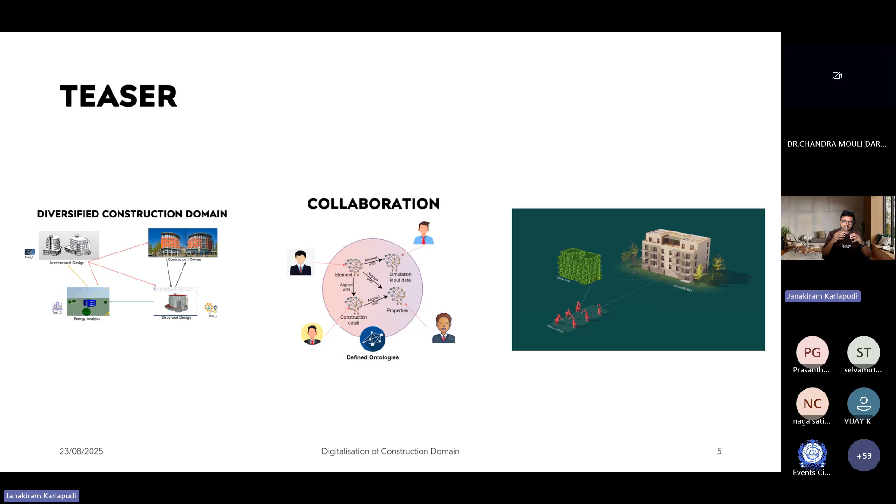Before I jump into the actual presentation, here is a small teaser. I try to take you through a brief discussion about the diversified construction domain and how it can be improved through collaboration and efficient sharing of information among engineers. And how do we take this into a practical application? How can we make everything feasible?

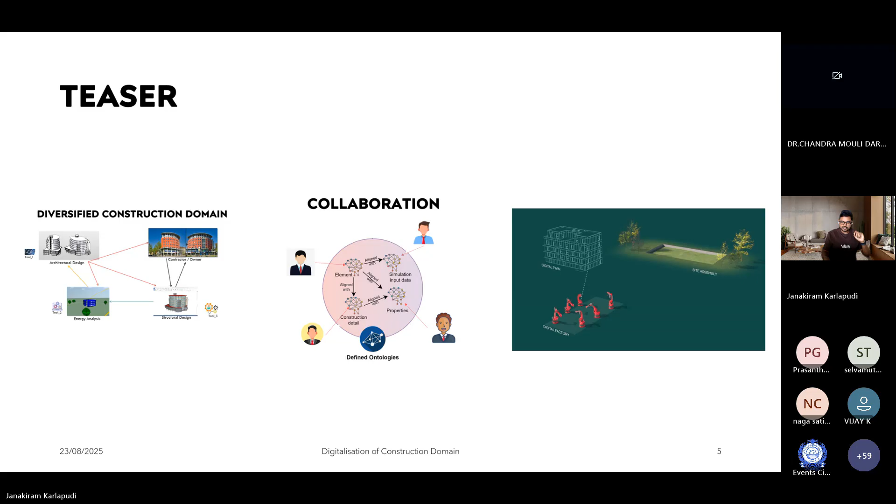Before I start with the background, I just prepared a small interactive session. I know it's been very active today, so let's take a step back, chill, and do an icebreaker.

I hope you can see this - it's Mentimeter. Maybe you can join either by scanning this QR code or going to menti.com and entering this code, so we can do a small interactive activity.

Trying not to have frequently asked questions - could you let me know if there's any trouble joining? Just give me a thumbs up if you can join. Fastest fingers first, I have only limited seats - I guess only the first 50 people can access it, so I'd recommend being fast.

Just wait a minute. If you've already joined, you can also join during the process. I just want to ask one small icebreaker question.

I know you've been in a session until now, so maybe just sit back, relax, and answer this question: one food you could eat for the rest of your life. It's just a one-word question, you can just type your answer.

Let me take this out. Let's jump into the background, the problem statement. As I mentioned, we are going to talk about the diversified construction domain.

Perhaps you might have experienced this in your working life - the construction domain is quite complex, involving a lot of engineers, many design perspectives, the creation of design models, and sharing of data among engineers.

This complex nature of the diverse construction domain always requires recreating existing data. This recreation is always time-consuming and may cause errors, and due to the lack of collaboration and how data is shared, this also results in poor planning.

What do I mean about poor planning or difficulty in collaboration? Let me take a sample example scenario and walk you through it.

Let's take a simple example: Bob wants to construct a residential building, so he hires an architect or construction firm and explains his needs. He wants to construct a 6-floor building where the ground floor would be for commercial purposes, for example shops and so on.

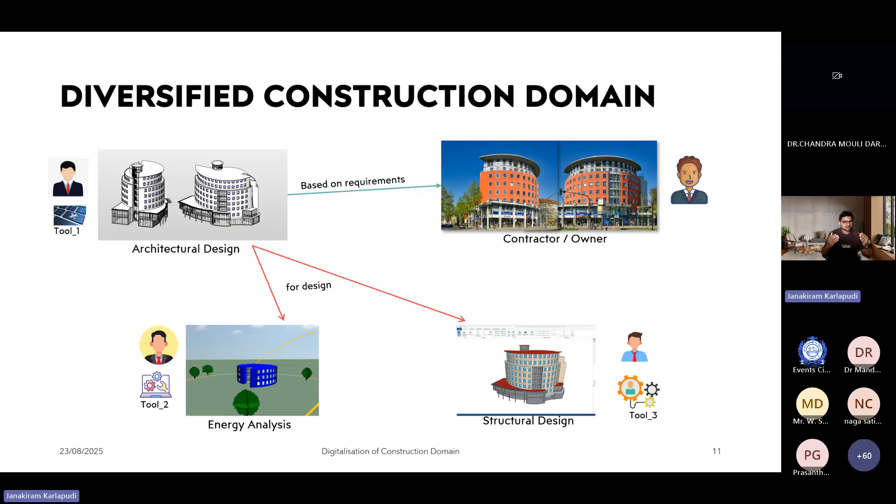Yes, it is already a red flag we see here. It is already a recreation of the data that the architectural model design has, and the other engineers need to regenerate the same information in different tools. As I mentioned, this is highly time consuming and also prone to human errors.

This is not the end of the design, so there are always design changes. For example, maybe the orientation of a building is not set properly so that natural light does not come inside, and they need artificial lighting solutions. To address that, the energy analyst sends back feedback saying you need to rotate the building by these degrees so that you get natural light and don't need artificial lighting.

The same process could happen from the structural designer's side, right? He can say, hey, the distance between two columns is quite large and it's producing large beams, so I need to place another column, and you have to divide your spaces according to that.

So this information is always shared between multiple engineers, and the other one doesn't know what is happening. His design progresses with the assumption that nothing has changed from the initial case. And this communication doesn't end at one engineer—perhaps the energy engineers and structural designers also need to communicate among themselves so they can design their piping or ducting systems accordingly.

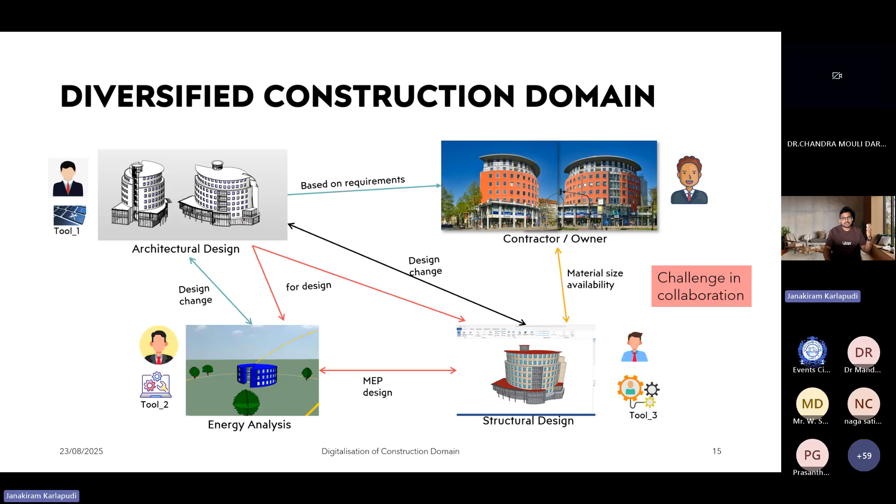Here is the second red flag, where the collaboration among these participants in the domain is very complex. This causes information loss and repetition, and ultimately a lot of time consumption, which leads to poor planning and poor budget allocation.

That's where building information modeling comes in. You might have heard about that. This is a business process that tries to manage the data among engineers and bring efficient collaboration among them. Let's take a simple example and try to understand it better.

There is a research group called buildingSMART International. They came up with a neutral file format called IFC, Industry Foundation Classes. So an architect designs his architectural model in any CAD tool like Revit, Navisworks, or anything, and he can share it with other engineers through this IFC file format.

So the other engineer does not need to remodel his building from scratch. He can simply import this file into his tool, and then he can start from there with his design case.

Let's dive into this building information modeling through another example scenario. Now we call him Rob. He's a friend of Bob, and he also wants to construct a building. But he wants to get suggestions from Bob because Bob had previously experienced this complex construction process.

According to suggestion from Bob, he wants to go with the BIM-based construction approach, where he tries to get the advantage of this collaboration. Again, he places his requirements, and then he tries to inform a company where it could be achieved.

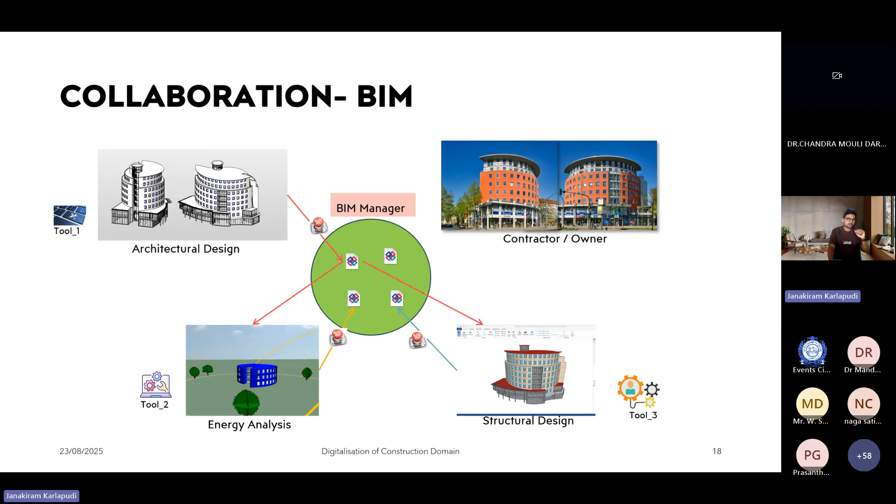In reality, how does this process look like? An architectural engineer or designer models his information here, and then exports his data into this IFC file format. This is not enough - he has to verify his data is accurate or not. So he uses an existing model checker. He loads his information into this model checker, and verifies whether the data is accurate and complete.

Until he reaches the completeness of the data, this cycle runs. Once he reaches a stage where his data is complete, he will inform the BIM manager that the data is ready, and the next engineers can take the data and proceed in their design. The next engineers can simply take the data and absorb it for the next analysis or design process.

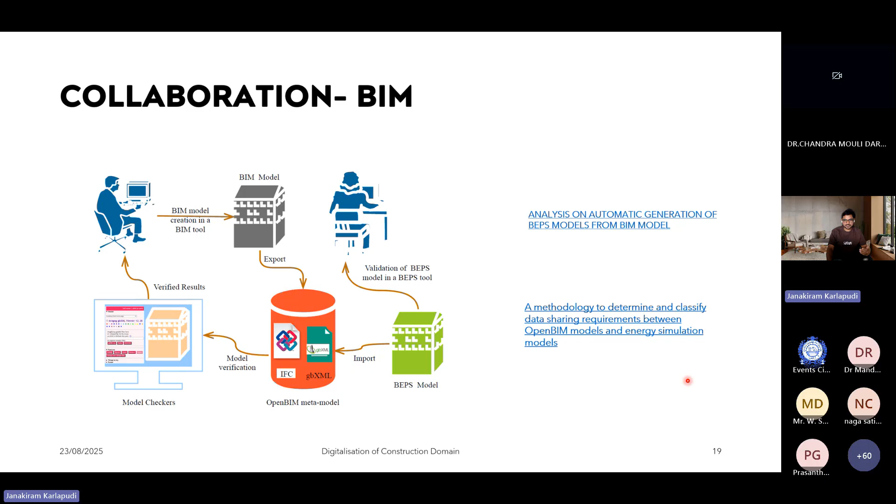Okay, right now we talk about sharing the data. Let's go into the next level - the availability of data. We don't only have data in a single format usually; there are particular ways data can come. For example, as by the previous resource, one can get point cloud data by performing a scanning of buildings, and there could also be some data related to sheets or data coming from sensors. How do we manage this data?

The solution here would be this cloud platform where you can store your data, which can be any format, and it can be shared among the users. But you see the lack here already - you have the data available in the cloud platform, but there are no links among this data. It makes it quite difficult to see what file is connected to what file, and how this data integrates with each other, and how a model or design evolved to the construction stage. So these are the lacks at the moment using this centralized cloud platform.

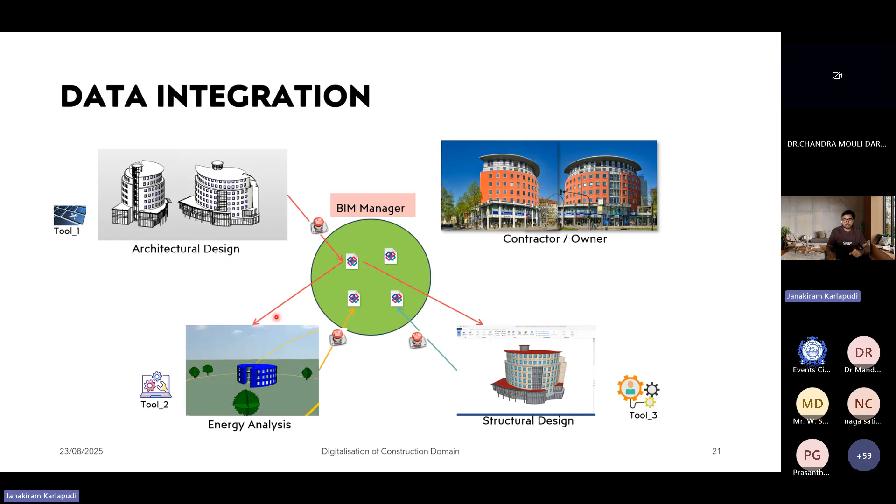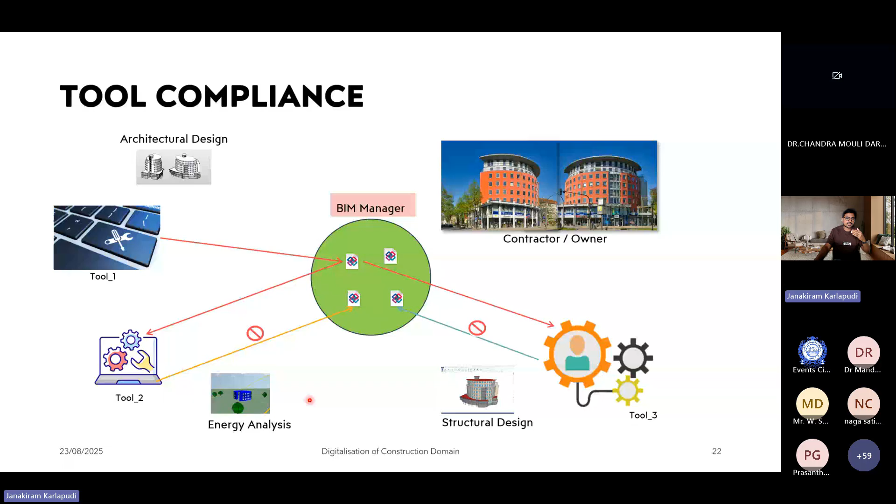Also, tool compliance, right? We talk about communication among the engineers, but more precisely, when we look into the process, it is more like a communication among the tools. Tools should take the data accurately, process it, and put it into the same format. This is where the trouble comes. There could be some tools highly capable of doing that, and others which may not be capable. Since these are vendor tools, perhaps we don't have control over that. This is one of the criteria we had to keep in mind.

When it comes to the summary of these slides, we talk about collaboration. Yes, it's definitely improved with the use of building information modeling. When it comes to data quality, we have manual validation measures through viewers and validation checkers, and we also have a mechanism for storing diversified data.

When it comes to data integration, it's still a problem, because we don't have any integration among the different varieties of data. When it comes to tool compliance, this is still a big issue because these tools are all vendor supported.

The final one, data extension - this is not possible at this point in time, because this IFC structure has been developed by a particular team, and if you want to extend this data, you have to contact the team and inform them: hey, I have missing data, and you need to extend your model for me to push the data into the cloud. These are the additional benefits of the current diversified structure. At the same time, we still have a couple of lackages in this process.

Before I jump into the next section, do you have any questions regarding the background or the need of digitalization?

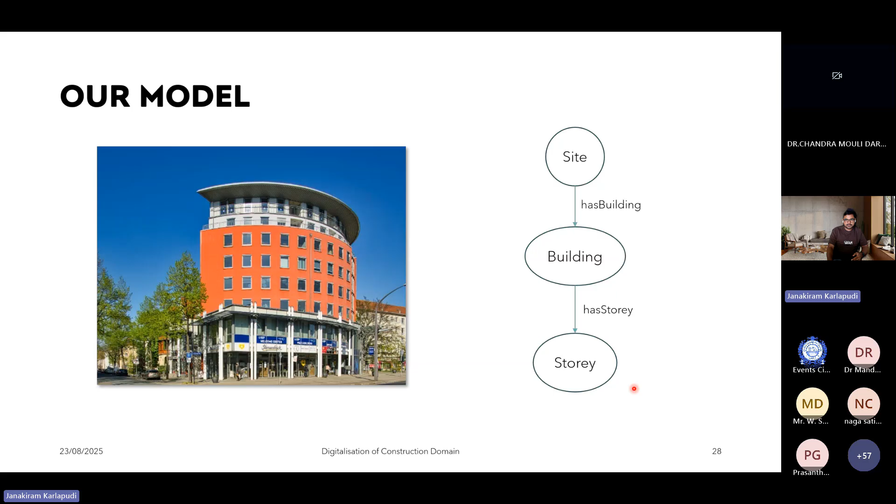Let's take a look into each of the issues we saw in the previous background section, starting with data extensibility. Perhaps we have a very large building and we don't want to construct the whole thing at the same time, for many reasons - you may want the same elements in phase 1 so you can rent specific scaffoldings, or produce a specific set of elements. In that case, one can easily segment the building into multiple segments, constructing this part and this part in the first phase, and the remaining part in the second phase. So how does that affect our ontology or model?

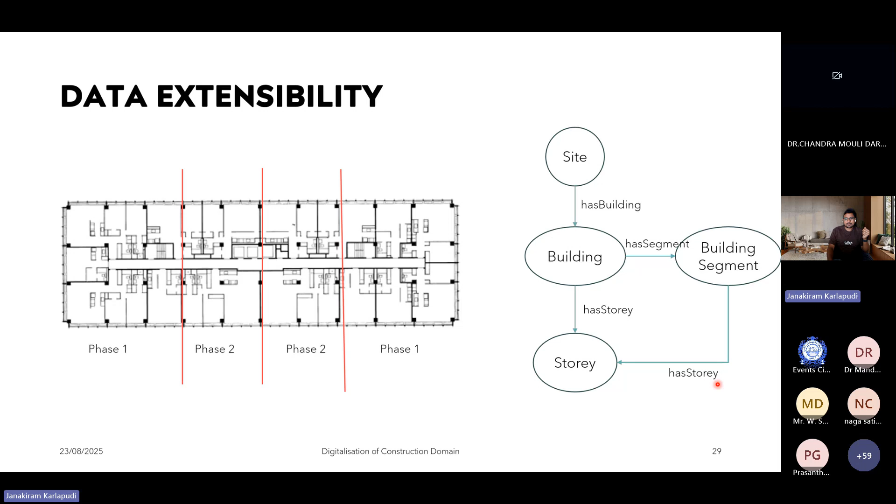We see that a site has a building and the building has a storey. Now we want to extend this information into segments. We can easily extend our model into a building segment, connected to a building using the property 'has segment', and this building segment is further connected to a storey with the help of 'has storey'. This is how easily extendable your model is. I'm showing it at a very low level, but it could be much more complex when modeling all the building data.

As I said about collaboration previously, we had much improved collaboration with the help of BIM, and it can increase further through different people and different data sets. Before we worked with file-based data exchange formats, but now we're moving from file-based data to data-oriented approaches, where an architect produces information about building elements, a structural engineer provides construction details, a simulation engineer puts in simulation data, and a contractor provides details about existing materials. All of these can be connected and interlinked through simple classes and object property connections, so one can easily track changes and understand the information stored in these sectors.

When it comes to diversified data, I want to show a simple example. One can easily scan existing monumental buildings and produce a view using LiDAR scanners and so on, which produces data in point clouds. There's also data from sensors tracking information from the building, sensing consumption, and some information about material data - so we can see what materials were used for the building. And as I mentioned earlier, you can also have information about your building model - what space you have, what wall element is beside what room, and so on.

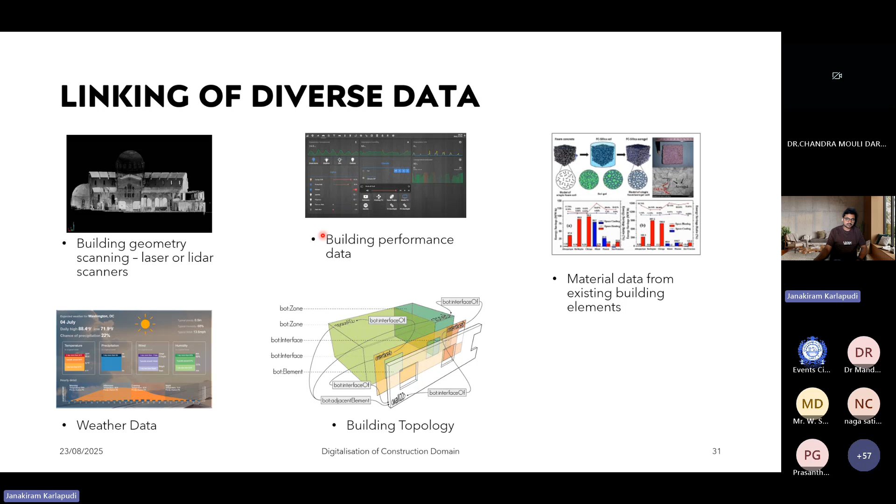And in addition to that, you could also have weather data just to compare with your building performance data. So in this case, how do you link these different data sets?

We extend our information model with the capability of linking these elements, extending our ontology schema. Let's say we have a link element connected to a link, and we can have multiple directional links - one directional, n directional, and so on. Now let's look into this example.

Let's assume we have different data sets. We have an IFC file that indicates architectural information, we have existing device information - a device placed in your building - and we also have another file format, a PDF, that describes your drawings information. There's also information about ontologies, where your data has been linked to each other, a data model, and information about precast library availability.

When it is readied, transported, and placed, all this information is in this document. Through this link model, you can link what file, and in this file what identifier has been linked to what other file in the same repository or the same cloud storage. This will provide you additional knowledge about this information.

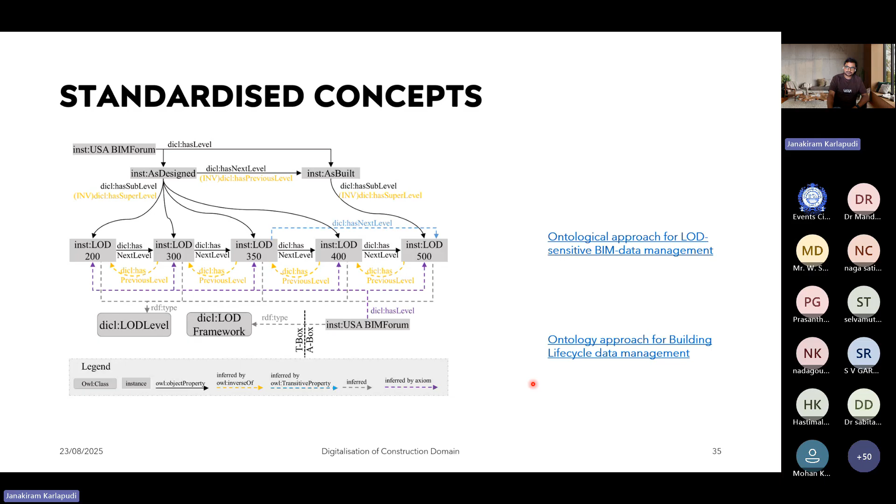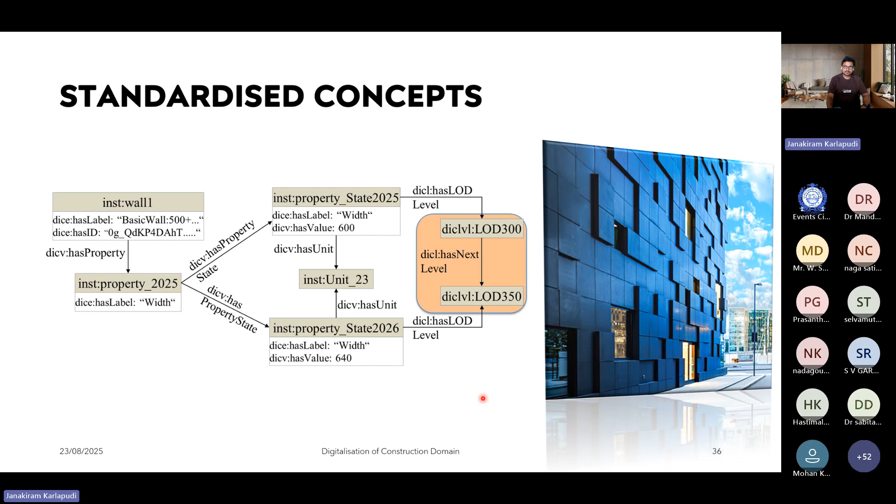Until now, we talked about files - an architect creates this model, puts his data into an IFC file, and another engineer takes this IFC file, and so on. But now with this ontology modeling concept, these ontologies are database-based concepts. Everyone needs to push their data into a repository or a central cloud-based platform, and everyone needs to extract the data from that. Let's take an example of how one can take the data out.

We have a defined query language for that, called SPARQL, which is a SPARQL query language. Its goal is to extract some information out of the existing graph where some patterns are matched - these are called conditions. When a condition is matched, it gives you that information out. This is a very standard form of querying your data. So what do I mean by a pattern, or a standard, here?

Let's take an example, going back to our model. We have a site connected to a building, and the building has been divided into multiple segments horizontally, and also has multiple storeys, each connected to its segment as well. Here is a query pattern saying that a subject, which is unknown, is connected to an object, also unknown, through the predicate 'has building'. This is a pattern - whatever matches it will output as the result of this query.

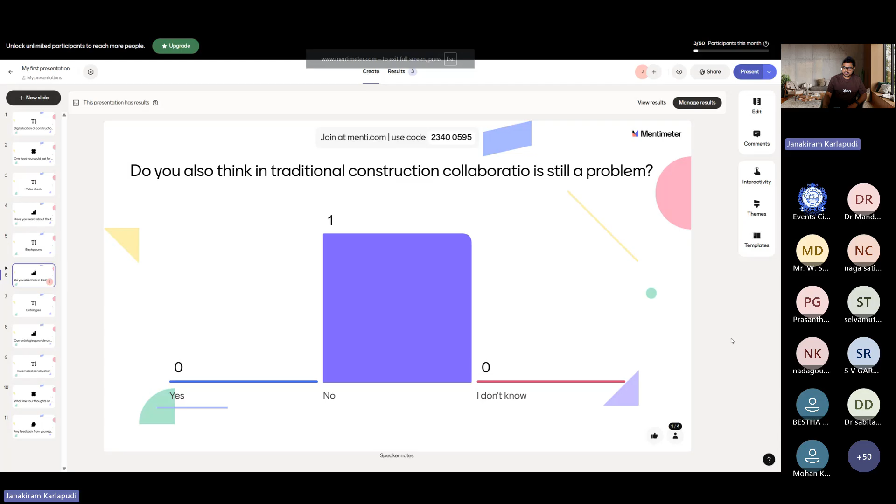Now I want to take you to digitalization in practice. How are we using this ontology technology, and what kind of advantages are we gaining from that? Before I jump into this specific section, I just want to give you a use case. This is exactly what we are doing at the moment in our factory. Perhaps it might be interesting to you.

We have approximately a 500 meter long production line. The goal of this factory is just to produce wall elements and slab elements with timber materials. We have approximately 45 robotic arms. Their job is to take the raw wooden pallets and convert them into beams, walls, or slabs according to our design.

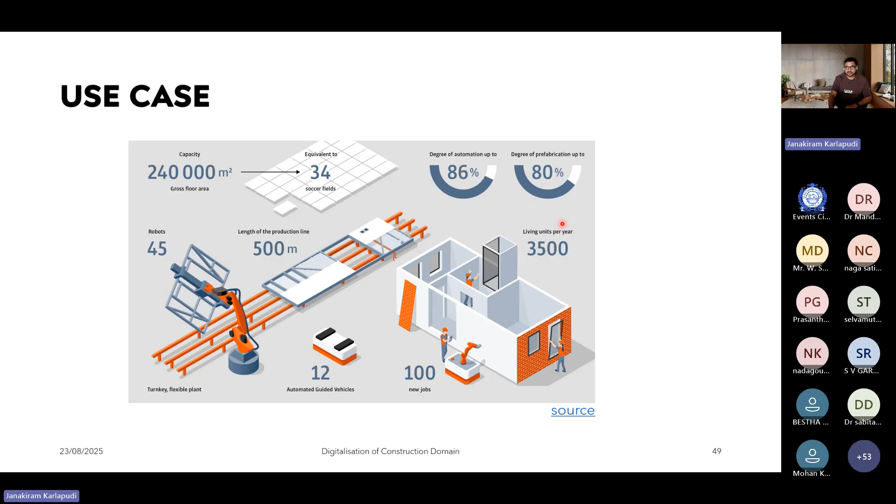Let me go to the next slide. So what we do in our buildings is a very normal process. We plan our buildings, and once our planning is done, we produce with the help of these autonomous robotic arms.

Once the production is completed, we transport them into the construction site and assemble these produced elements there. And once construction is done, as I mentioned, we also have sockets and a lot of sensors embedded into our walls and slabs. These sensors produce data, which we record, and then we give operational instructions.

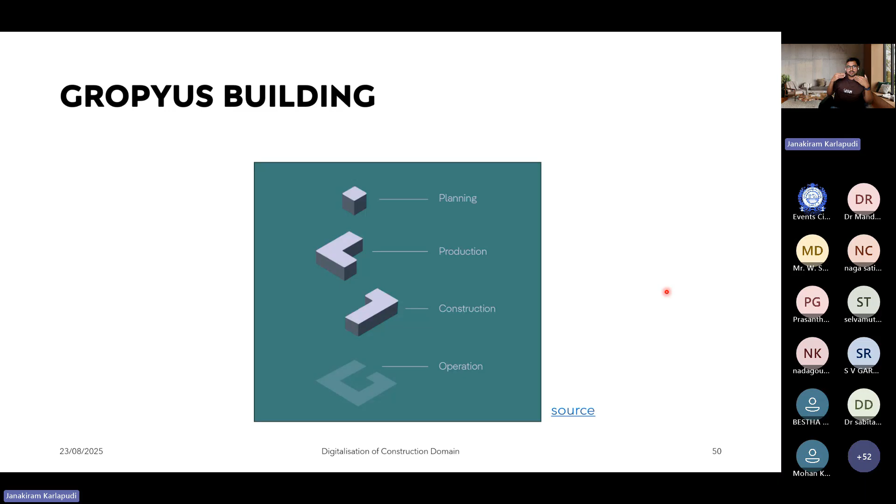We can dig a little deeper into our process. This is planning, which starts with layout planning. Let's say our Bob comes with his requirements, and we put these requirements into our rule-based engine. As I mentioned, it's a very autonomous and powerful engine.

You just need to give your site layout into this tool, and it generates a design based on your requirements, like needing 4 floors, or a certain number of single-room apartments, or multi-room apartments. Based on this information, the tool generates the layout.

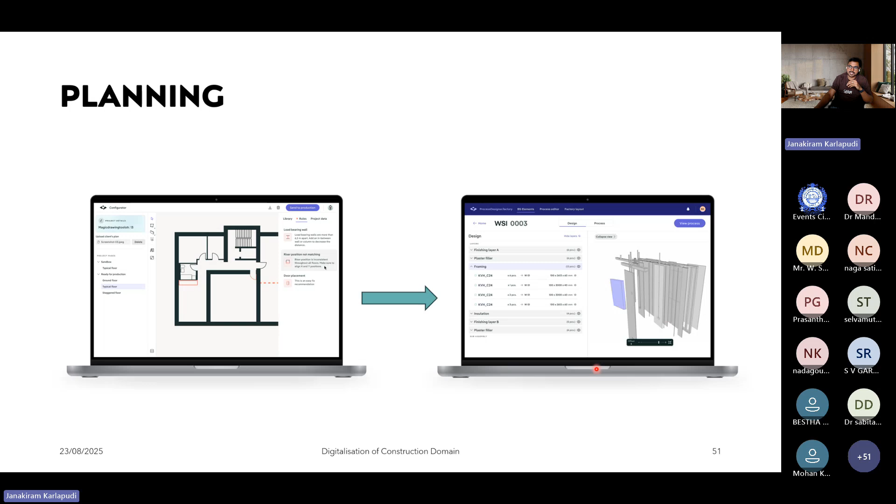Once the layout is completed, the next stage of design starts, which is almost like structural design—we call it parameterization. Based on the length between two supporting beams or walls, it determines how many layers of wood you need for a load-bearing wall, and other items like openings or windows, where they should be, and their dimensions. All this information is designed in the next stage of the process.

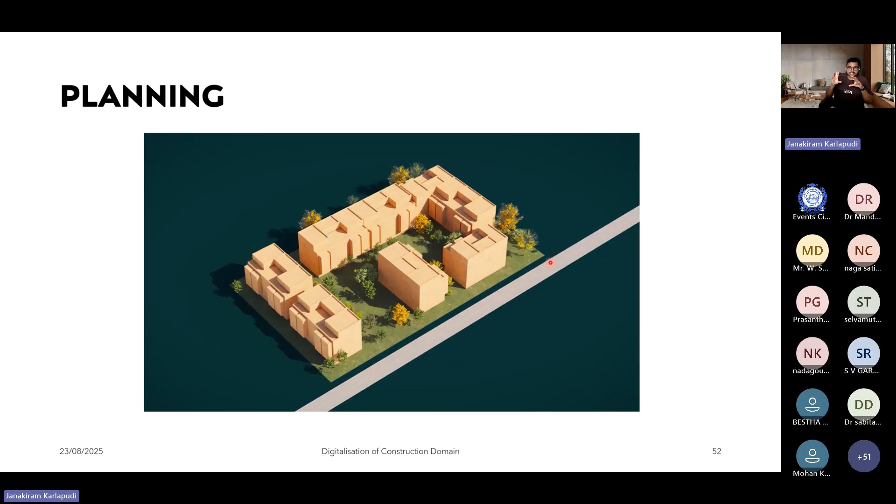I tried to come up with a simple video of this—maybe it's playing. As I mentioned, it's a completely autonomous process. You just introduce your site layout, and it automatically suggests what kind of building structures you want on this site, so you can adapt accordingly. This is a single tool that works and gives you more information.

I hope you had seen this video. I hope it played—sometimes these videos don't play. Just write me in the chat if this video has not played.

And once the design has been frozen, now it goes to the production. As I mentioned, we have so many robots in this factory. The goal is to produce these designed slab or wall elements in a sequential order, and they go directly to the construction site to be assembled.

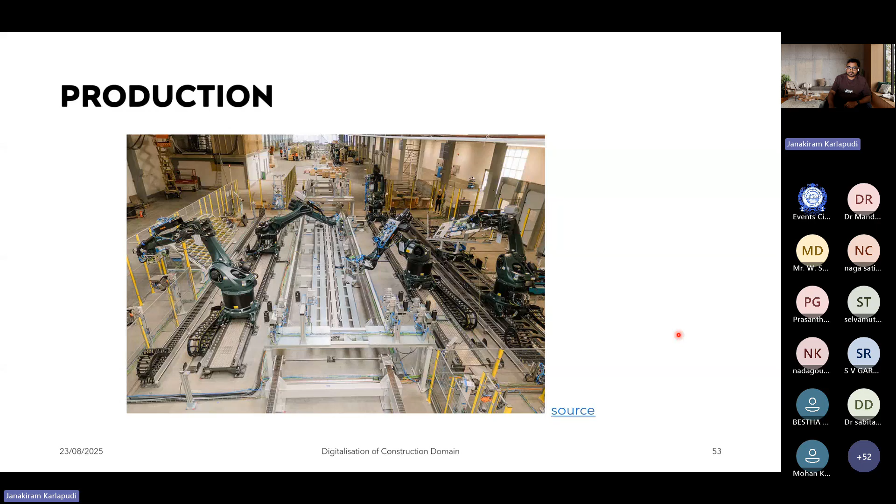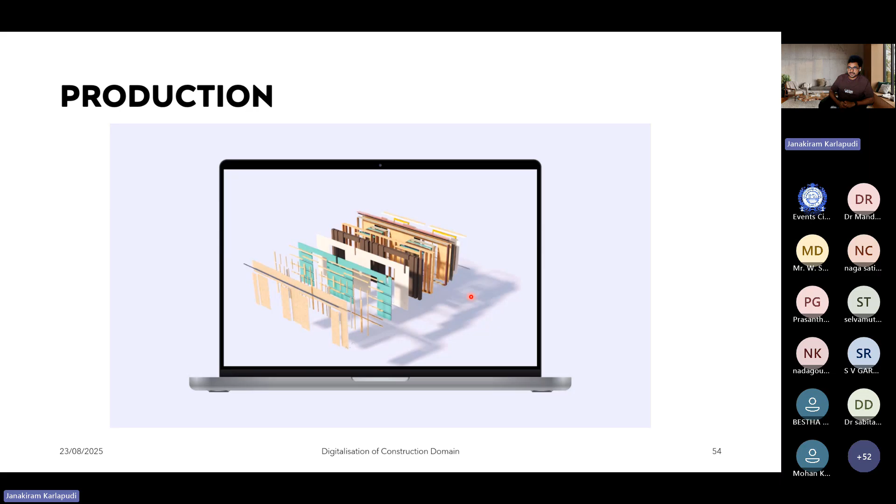This more or less tries to identify what type of elements we want to produce, and what is the number of these elements. Based on this information, it takes the raw material, breaks down each of the elements into what it needs to be built with, and then starts to construct each layer by placing on top of that.

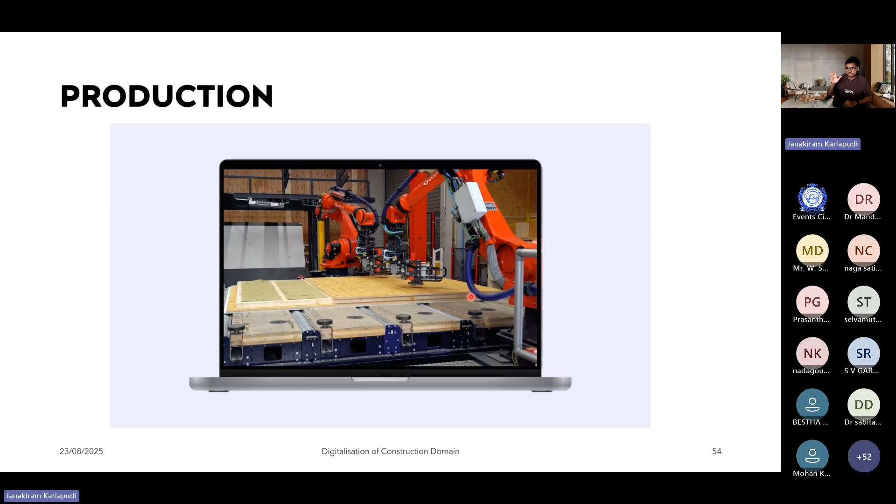And many robotic arms have many jobs. Some do the suction job, some do the guns. They have nails shooting into the wall fabrics, so that this becomes intact, and everything has been properly designed.

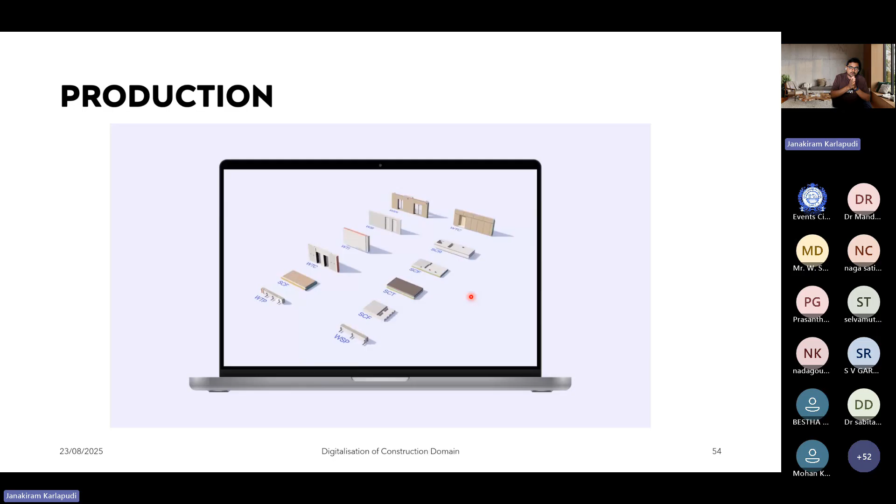And the next step is construction. Once the design and the production have been completed, they move to the construction site based on the schedules, based on the site condition. There is no storage on the site. They just take it out from the vehicle and then place it, and then complete the construction process.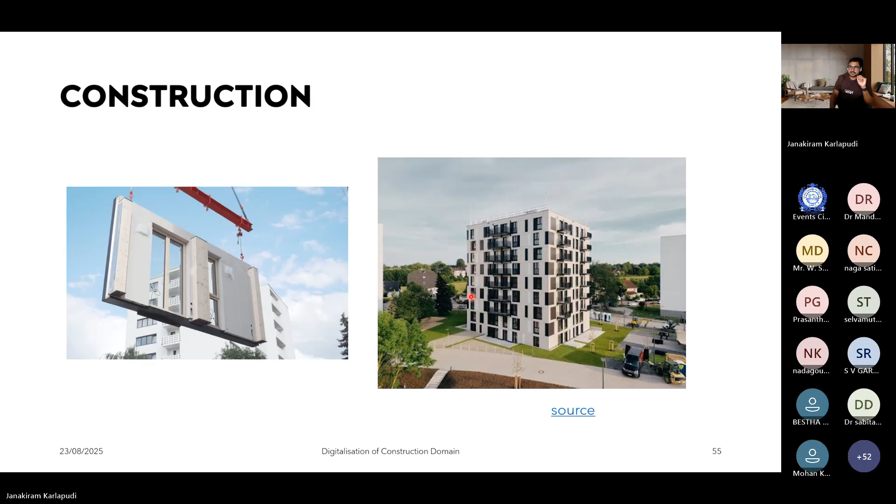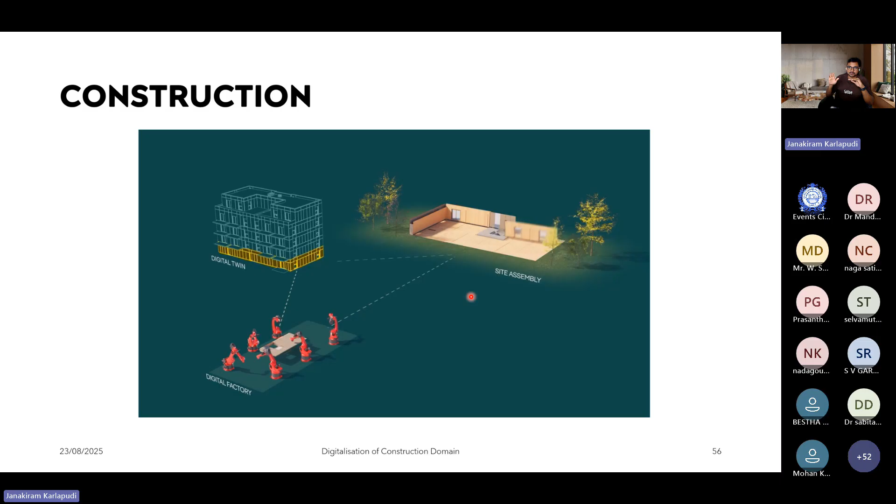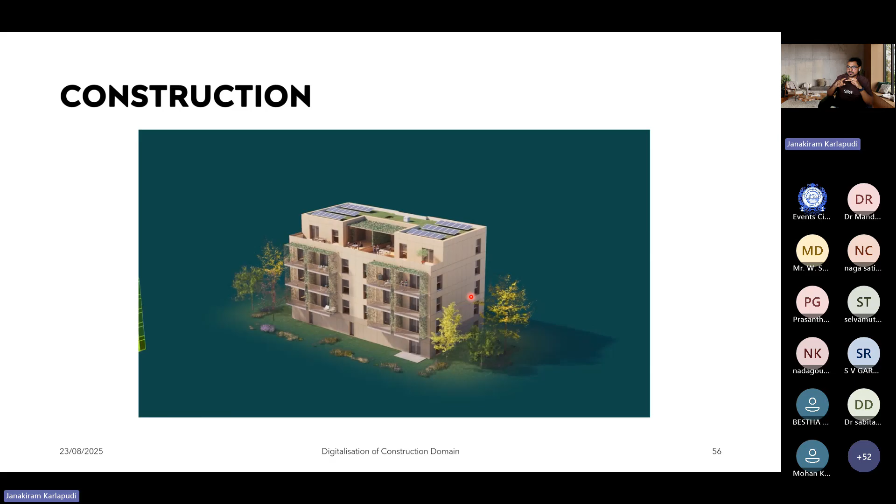So perhaps in this video I try to indicate that. Once the design has been frozen, they prepare the initial site, the ground floor, and whatever is produced in the industry goes directly to the site and gets assembled there. There is no storage. You don't need any additional support on the site. You don't need an additional mechanism to indicate where it goes and so on. And again, everything has been intact.

As I also mentioned, we have a lot of sensors built into these wall elements. The job is to sense the data - what is the consumption, what is the heat consumption in a specific room, what is the energy consumption in a specific room. We try to push this information as a notification to the tenants so that they will be aware of what they are consuming, and they try to reduce their consumption in such a way that they produce efficient energy consumption results.

At the same time, we do device management, security management, and if a device fails, we try to get that response immediately, and then the repair can be done, or a replacement can be done on the spot immediately.

For this whole process to work as planned, the heart of the ecosystem is the data. More precisely, it's how we are handling the data properly, and how we are gaining the data or gaining the knowledge out of this. This is where we come into the picture as data or knowledge engineers, having knowledge about construction, and at the same time converting the construction standards or construction knowledge into machine readable form. This is our job.

Let me try to give a simple scenario here to compare how this design process goes. This is a layer called a data fabric, or a data source, let's call it. Then we have the ontology models, which indicate how the data should be stored. And there is another external data storage mechanism - sometimes you cannot convert all the data into these ontologies, into a very structured data, so you could also store this information into different file formats. That is also definitely possible.

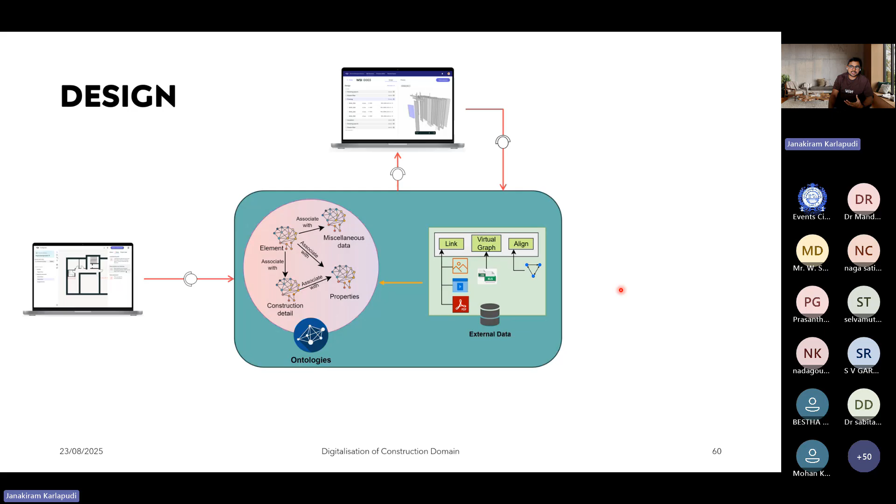When a design layout has been frozen, an architect designs information about the building based on requirements from the user, and this information is pushed to this data fabric where we have the defined architecture. Once this design layout has been frozen, the next one is the design for the structural part. The structural engineer takes this information, models and designs his information, and then sends back his feedback. The next process is production, and the production engineers take the information out of that, and then they tell us what parts are produced, what is the number of parts, and which part has been produced.

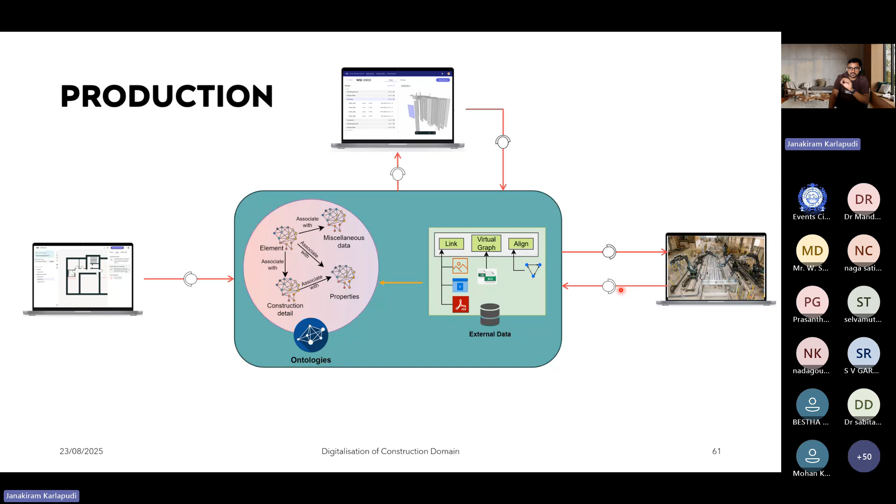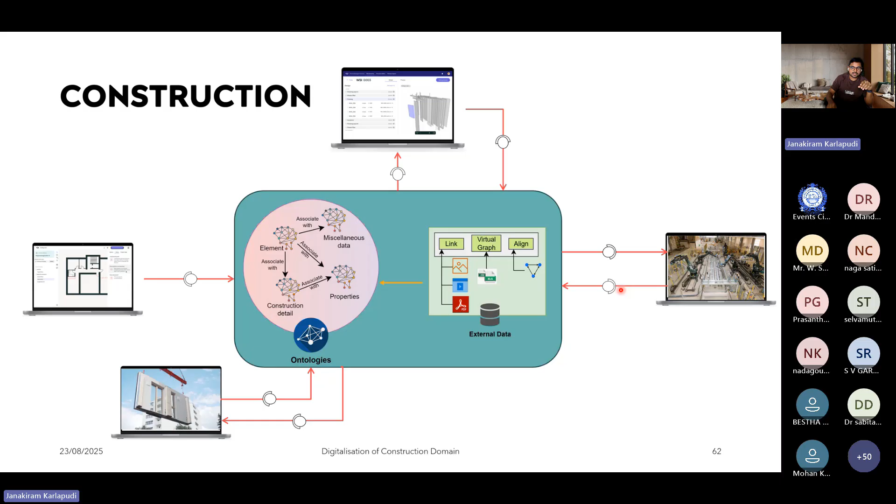And this information is continuously fed back to the data fabric. At the construction site, people consume this data and try to assemble the elements according to the placement they get. And they report back: we got this material and we placed it, and then this construction is over.

And that information has been stored again in the data fabric. In the end, what comes is the operation. So the operation people will take the data again from the data fabric, and they try to understand what are the consumption measures, what devices are placed, what devices are having troubles, and all this information they will send back. If they also replace any device, they will put this information back into the data fabric.

I think this is the complete loop of the operation in our organization, and it's completely based on our data fabric setup, and the information has been stored into data sites and external file formats.

Along with storing the data, we also generate a lot of business operational insights. So we try to render what parts of a building have been constructed. We try to see how many elements have been produced in the industry, and how many elements are completed in the placement, and much more information about where they are producing and what is the area of this information, and so on. So all this insight we produce, and we place it at the top level organization structure, so they could understand the running process.

Yeah, we're also doing these validations. You had seen data pushing, right? Whenever data is pushed into the data fabric, we have an intermediate layer where all the validations are performed. We define a lot of constraints. Once the data complies with these constraints, only then is it pushed to the data fabric. Otherwise, it's sent back to the producer, and the producer needs to make sure he produces the data according to the compliance, and then push it back to the data fabric.

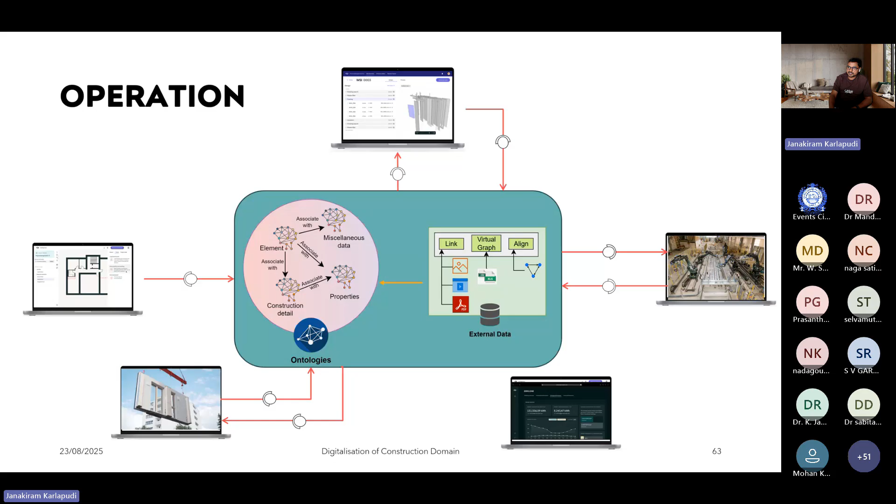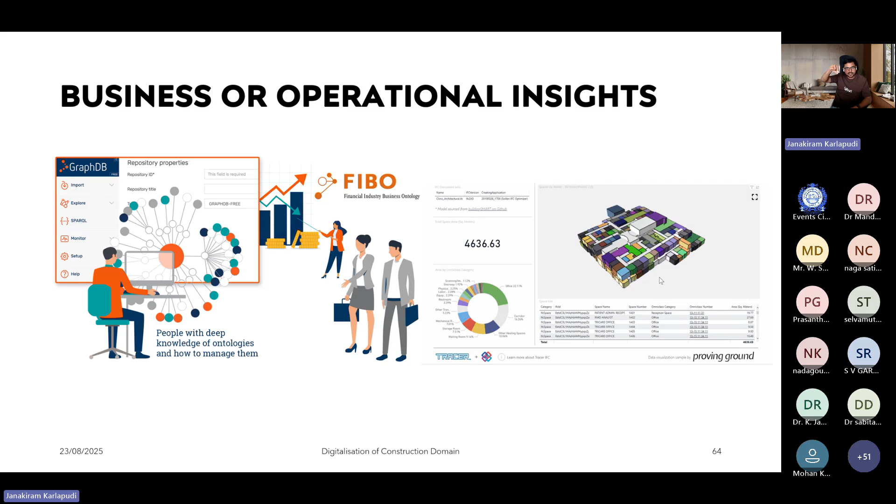No worries, I can go to the final section of my presentation. I just also want to touch a sneak peek on AI insights. But before I go there, it's a kind of very natural data. I cannot bring back very efficient organizational information here due to data privacy and many other reasons.

What we are using right now is a GraphRAG. One can definitely use this technology on data information and knowledge graphs. So RAG generally abbreviates for Retrieval Augmented Generation. It works on our large language models, like ChatGPT or Ollama, LLaMA, any large language model, and it connects to external sources of information like our building data.

These large language models have information about the nature of the society and all the information on the site, but they may not have information about a building which we are going to construct. So this is where we use retrieval augmented generation to connect existing information with external information. In that case, a new technology has been implemented, called GraphRAG.

So we connect knowledge graphs or ontologies, which I showed in the previous slides, with these external sources. This is a simple image generated from these GraphDB resources. You try to utilize the capabilities of a large language model, and connect this large language model with your data, the data coming from the knowledge graphs, which is called a GraphDB, a database resource.

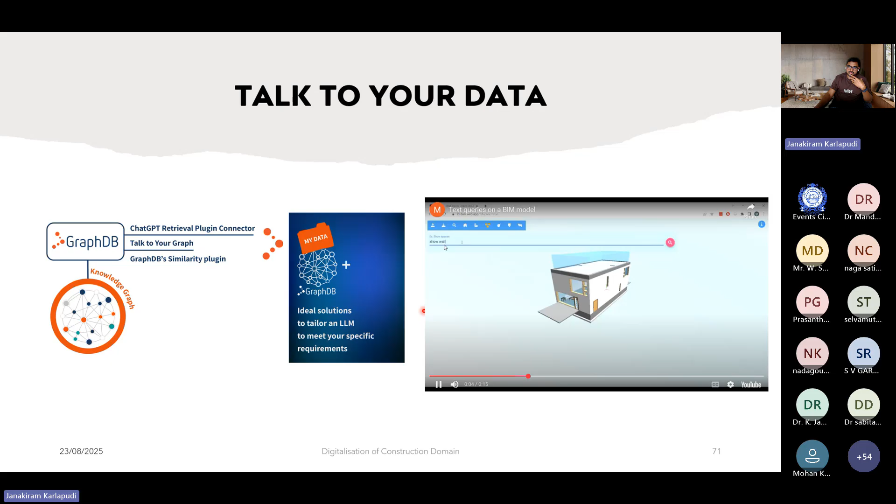You can do a natural language search, asking the model, hey, show all the walls presented in this model, or you could ask, I want to see the slabs, or I want to see the windows. While it is generating, in the process, you could also see at the bottom it converts into SPARQL queries, and then the results can be produced here. This is one of the advantages we could get from having the connection to this large language model.

Yeah, maybe one more example, which is what I mentioned previously. This is our simple model, and you can ask directly these questions: how many stories in the building? You can just phrase your natural language questions, and the database, with the help of this large language model, tries to respond in natural language. It knows how to sum up lengths because it has that knowledge from external sources, but it's trying to give the length value from your graph. So it takes that information and tries to give you these immediate responses.

You can have a communication with your data model as you talk to a ChatGPT language model. You can also ask a few more questions, like are there single doors in a building, or a few other such types of questions.

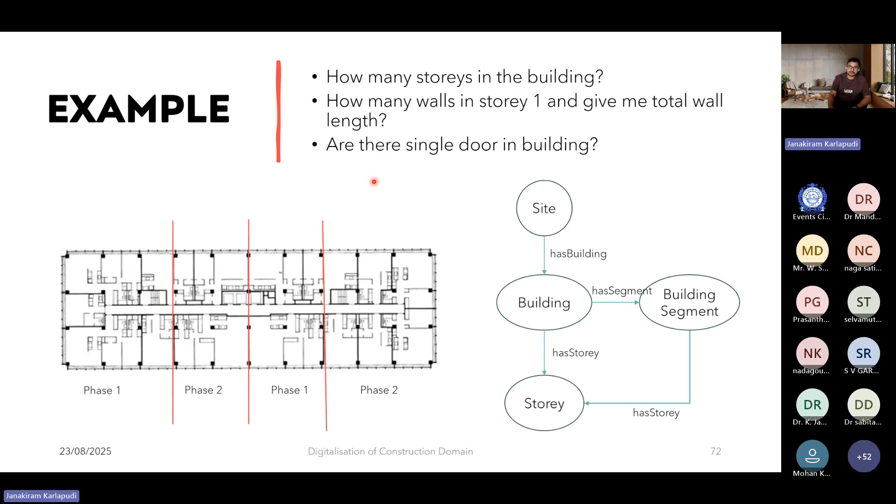Yeah, I've reached the end of my presentation. I thank everyone really for having your patience and helping me provide this long lecture here. I especially want to take this chance to thank a few team members, especially Satish sir, Santisagar sir, and Anil sir. They guided me in all of this process, helped me navigate, understand the process, and take it to the further steps. The team under the curtains, I know it's a long process, and you might have helped each other. I thank you really, everyone, to make this happen and take me to this further.

As I mentioned, you can follow my research on ResearchGate. I have approximately 24 research publications, and you can find the link on ResearchGate, or you can directly go there and sign up with me and search my name. I recommend you reach out to me if you need any suggestion or help on these publications. I try to make all the publications available to the public, so one can easily read and see how it could be helpful for you.

Also, you can recommend my publication if you like. We have reached the end of the presentation, as I mentioned. If you have any further questions, I'm happy to answer.